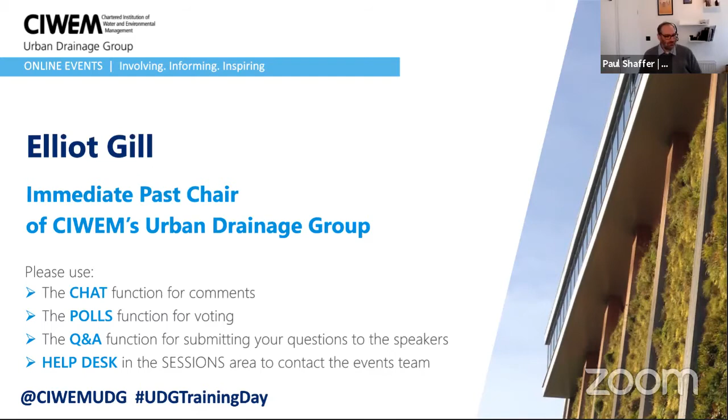A warm welcome, everybody, and thank you for joining us. Just a few words about the Urban Drainage Group, its mission, and some forthcoming events and activities that may interest you. The Urban Drainage Group is here to serve the entire urban drainage professional community in the UK and Ireland - everybody involved in designing, modelling, operating, and experiencing our urban drainage systems, and how they affect our experience of flooding and river and coastal pollution.

So it's quite a dynamic area. It's in the news a lot at the moment. I'm sure lots of you have been following recent news releases about storm overflows and the problems they're causing for rivers. That is just the topic that Urban Drainage Group is really interested in.

Coming up in the next few months, we've got a number of events. The first is an event in August, a conference over 2 mornings, and the theme is climate change and the effect it has on urban drainage systems. If you look on our website, you'll see a call for papers just published for that event. So if you or your colleagues are working in this field and would like to talk to the industry, your peers, and industry leaders on that topic, please read those instructions and have a look.

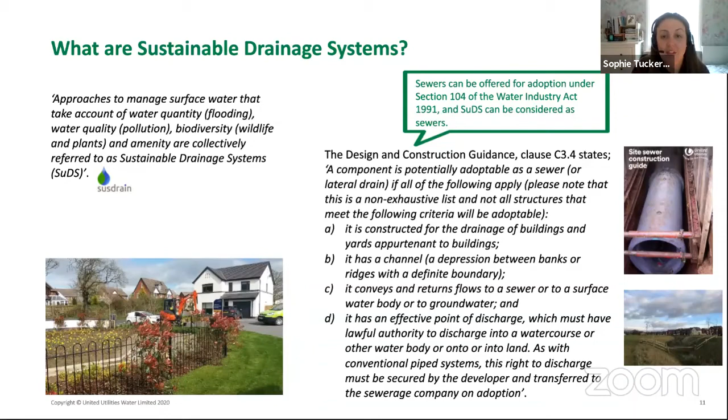As Paul's already given an insight to, they deliver multiple benefits. On the right-hand side, I'm not going to talk too much about this because it will be covered in more detail in a later presentation, but it just explains that certain SuDS can be considered as sewers and therefore adoptable by water companies under the Water Industry Act. So in summary, if something is constructed to drain buildings and yards, i.e. the hard standing areas associated with those buildings, has a channel to convey and return flow to an effective and lawful outfall, it can be considered as a sewer for adoption.

Now I'm going to talk about the drivers for SuDS and why they're beneficial.

On the right-hand side, the industry have developed Big Question 6, which is around how do we achieve zero uncontrolled discharges by 2050, which includes those from flooding and spills to the environment. This is part of the UK Water Industry Research Programme, and these questions are purposely ambitious for the industry, and reducing flooding and spills is of course a priority to us in the water industry.

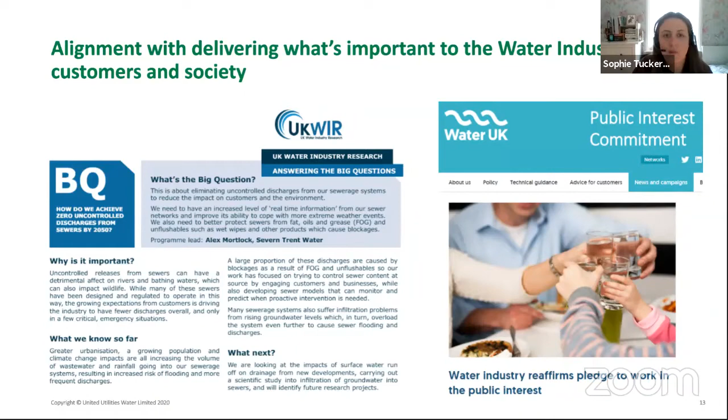Then we've got the public interest commitment. Water companies do have a unique role. We run a vital public service for public good, but we are private companies within England. So through Water UK, all water companies within England have signed up to a commitment with a view to how do we do more to meet the high expectations which rightly come with our unique role as a private company, but delivering that public value. I mentioned this as SuDS clearly provides a great opportunity to deliver multiple benefits to the communities that we serve. So it really does align with what's important to the water industry, our customers and society.

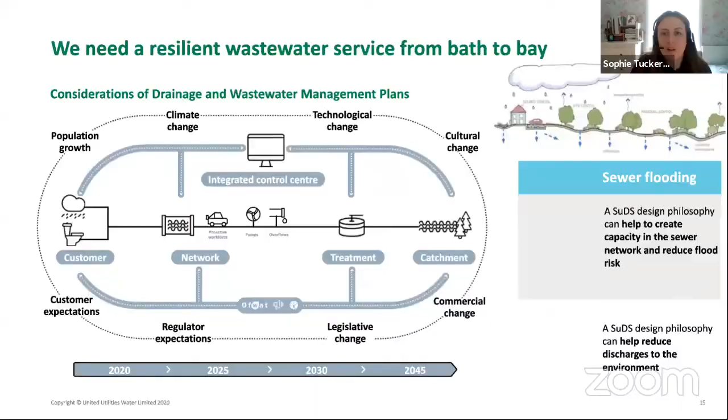When I reflect on the last 12 months from the news, you could argue that we've been disproportionately affected. Therefore, for me personally, this further reinforces why we should look to deliver more SuDS.

So Bath to Bay is a cross-cutting strategy for us to provide a resilient wastewater service. The image shown is for the drainage and wastewater management plans, which is the new way for organisations to work together to improve drainage and environmental water quality, providing the basis for collaborative and integrated long-term planning by water companies with other organisations.

It provides a visual showing how we take wastewater away from customers' properties through the network, which includes pipes, pumps and overflows, to the treatment works before it's treated and returned to the environment. So when we think of our service, the role for SuDS can help us with challenges we face in terms of sewer flooding as well as sewer overflows.

When we think of sewer flooding, our sewers, particularly combined networks, surcharge during rainfall. So there's opportunity to manage that rainwater in a more sustainable way, which will help with that, but also it can help with our ability to freely discharge where we have separate sewer systems, because there is an increase in risk with climate change of hydraulic locking of our outfalls.

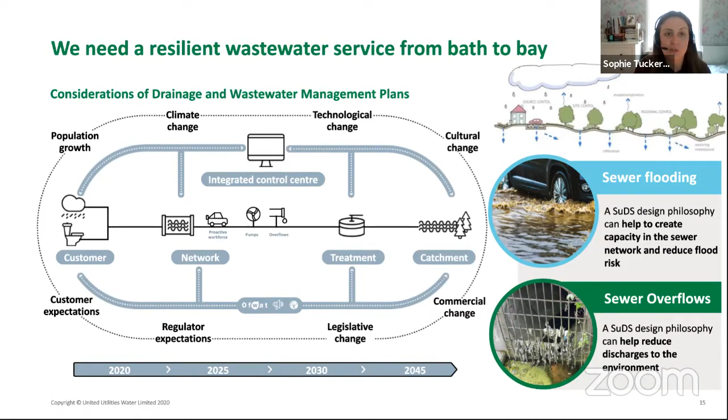And in terms of sewer overflows, if we can manage that everyday rainfall in a more sustainable way and have less of it discharging downstream to the drainage network, by managing it at source or within the site, then this would reduce the need to spill to the environment. Next slide, please.

So now I'm going to talk about SuDS in new developments and some of our experience in adoption.

This slide is a little bit tongue-in-cheek. I've used the term expectation versus reality, because the images taken from the CIRIA guidance show high quality SuDS. However, what is being delivered shows the industry we are all still learning. It's currently more end of pipe attenuation, and you can see a pond within the corner of the site, an interpretation of a pond, I should say. You can clearly see it doesn't really appear natural. It looks a bit heavily silted and it's in the corner of the site.

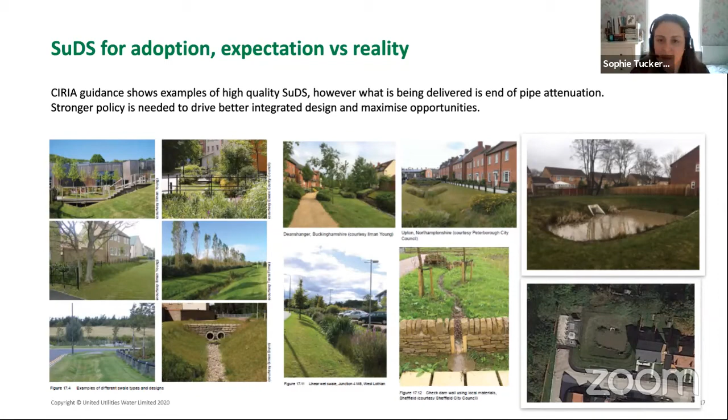So I personally am of the opinion that stronger policy is needed to drive better and integrated design to maximise opportunities. Next slide, please. And just to share some recent experience, lessons and observations.

There is the CIRIA construction guidance, which has a wealth of information and shows a lot of photograph examples of good and bad practice. If you've not taken a look, I would definitely signpost you there. The image I've shown is quite a common issue where there's perhaps not appropriate sediment management within the design and perhaps not the appropriate longitudinal gradients throughout the system.

I've included an image of a SuDS system in the Cheshire area, which shows it reasonably well constructed with a sediment forebay and low flow channel. But just focusing on the observations.

So I've already talked about that, designs are typically end of pipe attenuation, and that makes them deeper components as well, so we've got to think about health and safety. They don't always look natural. And some of the products specified, you could argue, are they appropriate in terms of the inlet head walls, the fencing, all that sort of stuff.

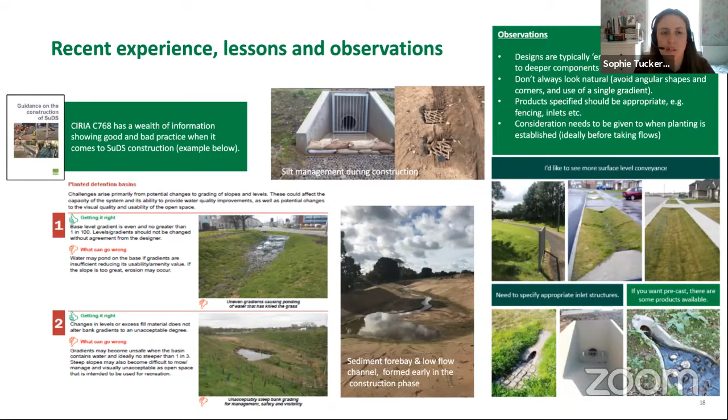And finally, consideration really does need to be given when planting is established. We have had some lessons on sites where the SuDS are constructed reasonably well. However, there's been a period of time where it's just left without any sort of landscaping, so it hasn't established before it's taking flows. Next slide, please.

Now I'm going to talk about delivering SuDS retrofits. If there's one thing you can take away from today, it should be that SuDS opportunities can be created almost anywhere. I am of the view that SuDS should not be delivered purely as projects focusing on drainage requirements. As a SuDS advocate, one of the most frustrating things is the delivery of green infrastructure that misses the water management opportunity, i.e. the green-blue link.

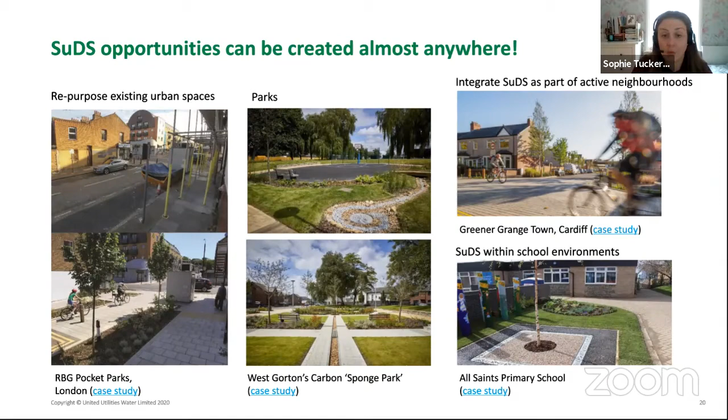This is really interesting. The main driver for this scheme was actually around health and safety, with cyclists regularly involved in road traffic accidents. The location is adjacent to the River Taff. But what was recognised was the surface water runoff drained to the combined sewer, which was then pumped to the treatment works. And what was great here was opportunities were linked up, presenting the chance to deliver a fantastic and award-winning sustainable drainage scheme.

At United Utilities, we are delivering a number of SuDS in schools as well, and we hope to have our own case studies on SuDS training in the future.

Here I've just shared our long-term vision in terms of surface water management. It's important to say that, particularly around retrofitting sustainable drainage, we are absolutely learning and building our capability to deliver more retrofits. To do so, we really have a huge dependency on partnership working if we want to deliver SuDS schemes similar to those shown on screen.

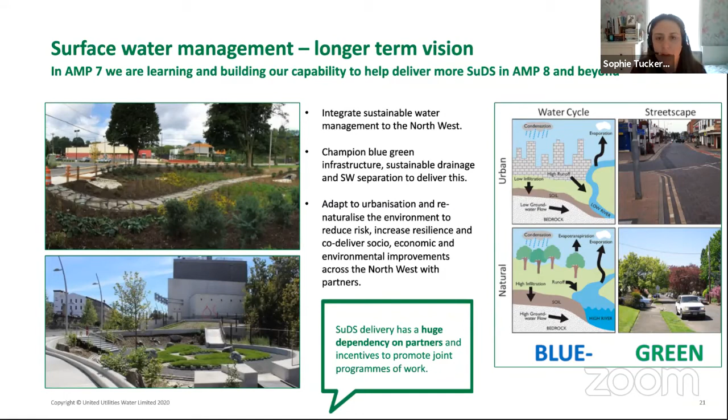This can include cross-cutting strategies like climate change mitigation, carbon reduction, natural capital, as well as underpinning strategies like Bath to Bay, which I mentioned earlier.

Then we have to make a decision in the context of the needs of our customers, the environment and our assets. What do we want to do, which then informs the interventions we might look to do. That could be from monitoring and responding to operational interventions or partnership working, or even project life cycle in terms of whether we want to refurbish something, replace something, or build a new asset.

So it's the asset management decision making that informs any project requirements at the start of a project when we're looking at delivering an intervention.

And of course, all interventions are prioritised. We have to consider the value, considering cost, risk and performance, and of course the whole life cost of that.

So as we build our capability, this includes identifying needs in partnership and the development of designs that include SuDS, but also the delivery of supportable assets that we are confident to operate and maintain, with clear asset information so we can set appropriate maintenance tasks for the assets so they perform to realise the benefits they're designed to deliver.

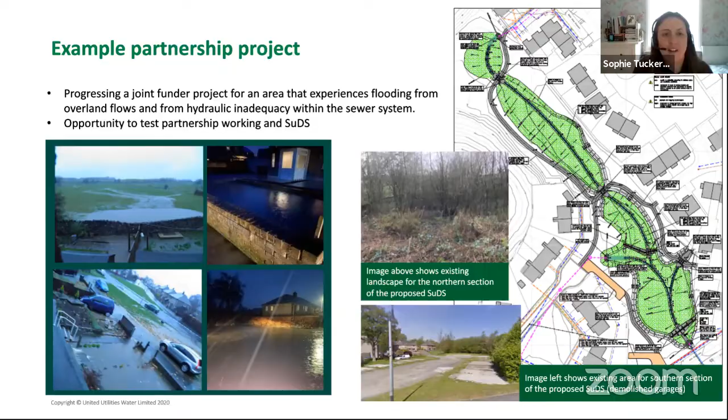So when we think of us as a water industry and reflect back on the public commitment, public interest commitment and all other things, it feels really positive that instead of just burying a pipe below ground that has little value to communities, in some cases SuDS can be the right solution to deliver those greater benefits. So on that note, that's just an insight to SuDS and the water industry.

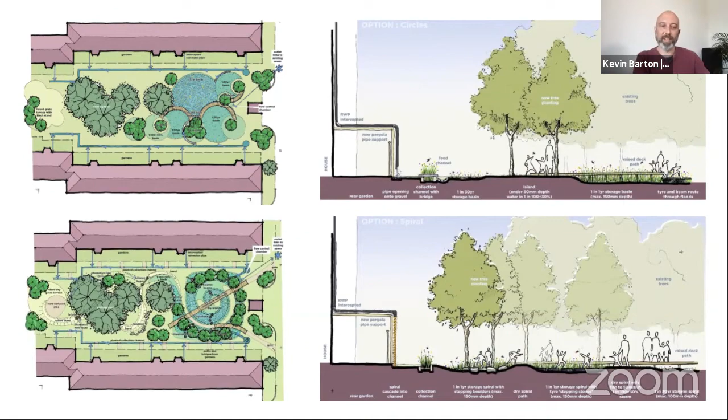A project of ours in White City, lots of opportunity for creating dynamic, playful, climate resilient landscapes. That's another big issue for us, that we really employ SuDS to resolve in cities. Again, it's the opportunity of rainwater, by diverting rainwater to these landscape spaces that manage that rain. We can create incredibly resilient landscapes that are resilient to the droughts we increasingly are seeing through the summer months, to create this sort of quality green infrastructure that can be playful and bring all these multiple benefits, and connect people with nature and the water cycle. That's something that's been sadly missing from our urban environments, is this lack of connection with rain and the water cycle.

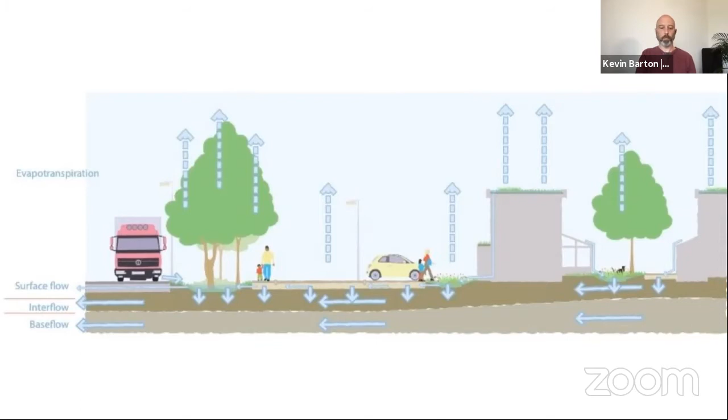Another important idea is interception losses. This is about emulating what happens in nature in most rainfall events, where the first part of a rainfall event just coats the leaves of trees, coats the surface of plants, and soaks into that first bit of topsoil, rehydrating soils. We call these interception losses.

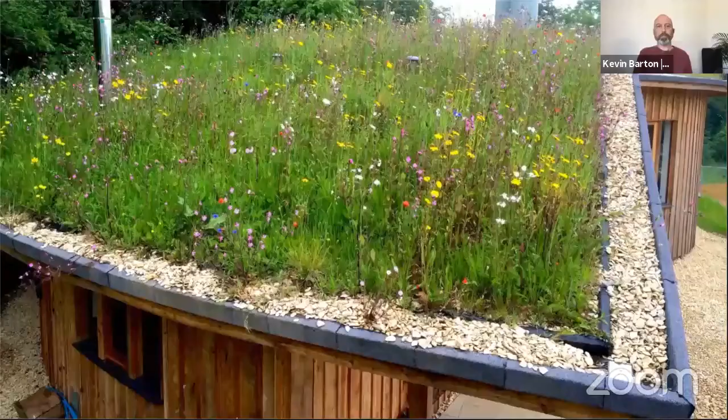The more we use nature-based solutions and spread the management of water across our site, using the urban fabric wherever we can to manage rain, the more interception losses we get. Something like this green roof will lose 10 to 15 mil of every rainfall event, more than 95% of rainfall events will just soak up into a green roof like this, 100 mil of substrate. Any pollutants are lost, but at least the first 5 millimeters of rain will just disappear onto this green roof and won't drain away.

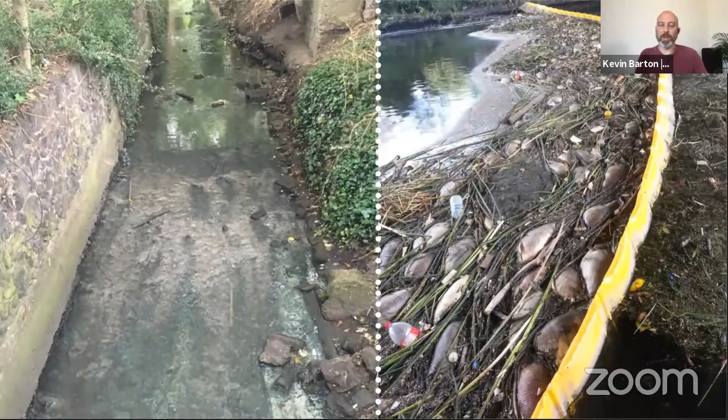We really want to reduce the risk of pollution, not only to the wider environment but within the development itself. These mass fish kills we regularly see in our urban environments are caused by the cocktail of pollutants, heat, and microplastics that wash off our urban surfaces, particularly in summer when natural river levels are low and there's limited dilution. Plus, the heat from urban surfaces means polluted runoff carries very little oxygen. We get these mass fish kills.

We have an epidemic of misconnections in our urban environments because our rainwater pipes disappear into the ground and people don't know the difference. They assume it's all dealt with correctly. They plumb in a toilet, plumb in a dishwasher, and we have urban waterways which are wall-to-wall sewage fungus, and you can smell it from 20 meters away.

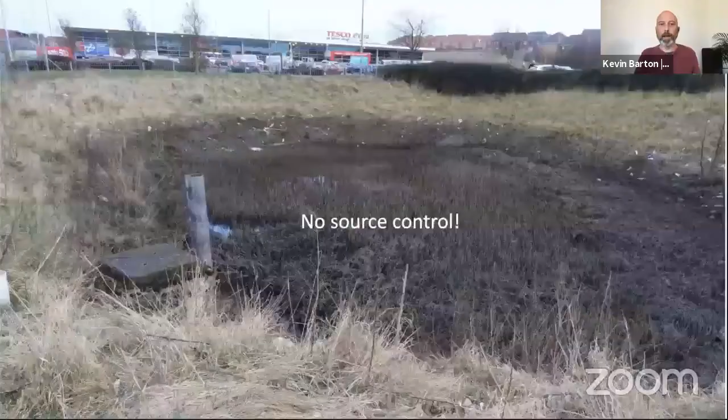Yes, we need to solve those problems through our SuDS design, but if we only focus on trying to clean that water before it leaves to protect the wider environment, we fall into the trap of potentially having features like this, where we use the landscape just to remove pollution and protect the wider environment, but create spaces within our development which are highly polluted, ugly, a maintenance issue, and don't hit the other pillars of SuDS, the amenity and biodiversity. It's actually a negative amenity feature and a negative biodiversity feature.

So we want source control features within our development that remove those pollutants as close to where the rain lands as possible, as close to where those pollutants are mobilized from urban surfaces. Things like permeable pavements, green roofs, bioretention rain gardens, filter strips, and swales that take that pollution out early in easy to manage ways, protecting things like this basin here, which is a play basin in the heart of a housing scheme, so that it isn't getting polluted runoff when it rains and can become a usable landscape space.

We want to manage water at or close to the surface. Our aim is to manage it at the surface as much as possible, minimize the water disappearing underground, and bring it back as soon as possible. If we have to put it underground in a pipe, that pipe is a connector between SuDS features, the landscape is the network, the drainage network. The pipe system isn't the drainage network. It's simply a connector where we need it to go to a flow controller, from one piece of SuDS system to another. But wherever possible, we're trying to manage the water on the landscape.

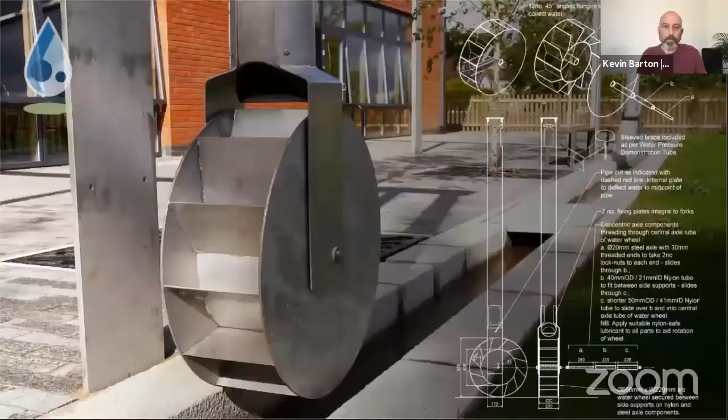If we do, we can create interesting features like this swale maze in a school, which brings lots of benefits around play, amenity, education, and biodiversity opportunities. We have landscapes that come alive when it rains, these dynamics of landscapes changing, with people connected to that water cycle, seeing things happen when it rains and understanding that the landscape has this other life, this other function, seeing this clean water regenerating a landscape, keeping it alive, even having playful features that really make the most of this.

We've got one case in White City where I saw a young boy take his mother over to one of the rain sculptures. He understood that this visual effect only happens when the rain's hard enough, and it was only raining gently. So he explained to his mum that it wasn't happening yet because it wasn't raining heavily enough, and asked could he come back later if it was raining more heavily to see this visual effect happening.

In this science block, we had these demonstration features of a water wheel and a tipping bucket, and another feature around the other side, to make this landscape come alive when it rains and keep this water flow at the surface and visible, creating this dynamic landscape.

One thing that's really important to us as landscape architects, and should be to anyone working in urban design, is that we need to be designing our systems to benefit local communities. There's lots of opportunities that SuDS brings in terms of benefiting local communities.

Here, two lanes of highway were put over to green infrastructure to manage runoff, but it's effectively created a park where there wasn't one before, and people are changing their behavior - getting off the bus earlier to walk through this on the way to school, using this space as an amenity at lunchtime. This is an expansive SuDS system, managing runoff at the surface - polluted runoff from this highway across a flush curb as sheet flow into this cascading SuDS feature. It's a totally multifunctional feature which benefits the local communities of Sheffield.

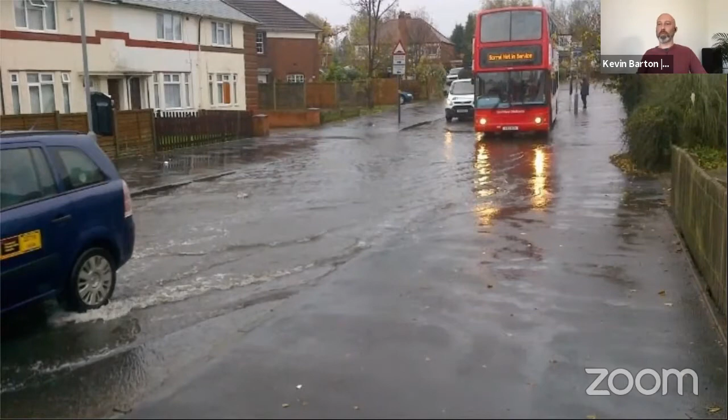And finally, you probably wondered where this one was - what we historically have focused most on, the flood risk. Yeah, obviously, that kind of catchment scale or local flood risk. Probably because I'm running out of time, and I think we've got a 3-minute lag, which would make the poll very difficult. I won't probably do the poll at this point, but just say that, yes, actually, obviously we need to do that.

And actually, if we've done all the other things that I've talked about, the other kind of philosophies of the SuDS, actually we've achieved most of the kind of flood mitigation that we need to. It's actually then quite easy to achieve the sorts of volumes we're talking about.

But there is kind of one fundamental shift, which I think really helps us design in ways that allows us to exploit as much of the landscape as possible. And that is to think of not what volume does my whole development need to manage, but actually what volume does each surface, each roof plane generate. Typically on most schemes, that is around 70 to 100 millimeters depth of rainfall that lands on every hard surface is what you will need to find space to store in the landscape.

And if we break it down like that, as in, this roof plane generates 5 cubic meters, I can start finding a space to put a rain garden, and then a swale with attenuation in it, or a basin, and I can start finding spaces around the landscape that manage the runoff that comes from that particular surface, or that car park area, or that footpath.

This is really critical, and I think something that is often missed from design - there's a volume that each surface generates. If we think of it like that, then we're less tempted to resort to one feature or a couple of features down at the end of the system that's managing the runoff from the whole development. We need to think of it as each catchment, each roof space, each hard surface generates a volume of its own that we can manage in the landscape.

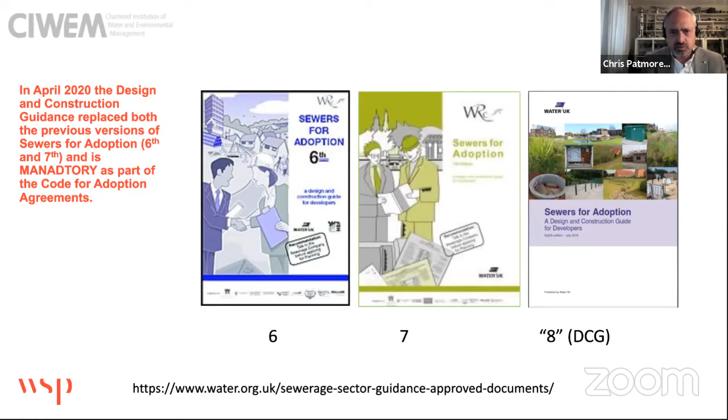The other key thing about the new design and construction guidance is that it's now mandatory. It may not be fully aware to you, but sewers for adoption previous versions were still guidance, so there was some flexibility - a different approach between water companies on various ways of dealing with materials and construction techniques. The new DCG is now mandatory across all English water companies. There are some subtle changes allowed, but essentially if somebody presents a design in accordance with the DCG and it's presented for adoption, then the water company is obliged to adopt.

So if we run through some of it - to accompany it and publicize it, there's been a few white papers and guidance notes. I've given links to a couple that have come out since. Probably the leading one is the Water UK one, which is basically the people behind the DCG in the first place - it gives you a quick overview of how it's aimed to be implemented and how it's applied.

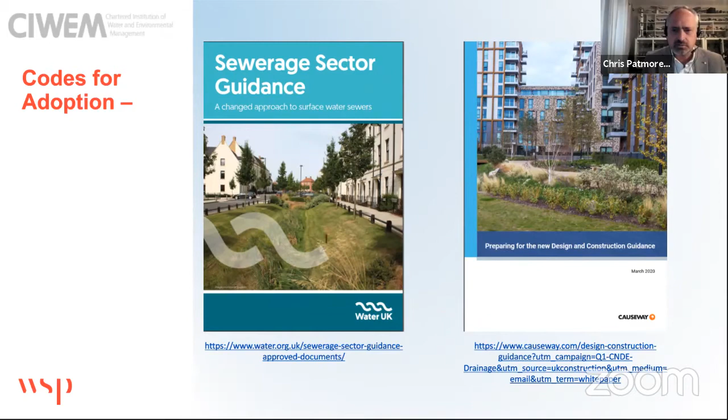What it looks like - the DCG is actually part, as I said, of this code for adoption, and it's referred to as Appendix C of the code for adoption. The website link is here. As I said, it's worth reading a lot of the other sections about how the adopted drainage network can be applied for, what information is required, and how the process works.

Also there's a review system, because it is a new entire suite of documents rather than one - they're looking at whether there are some issues with it, are there ways it's not being brought forward, are there communication issues, are there documents that are just plain confusing or don't include enough information. So this process is built into it. Appendix C is the design and construction guidance, which is essentially sewers for adoption 8.

But basically, the main change from all the previous sewers for adoption is this massive step change into trying to address SuDS, trying to incorporate SuDS, but doing it in a way that doesn't mess up the legislation or require additional legislation to make it function. So it's all worked around the existing Water Acts, the NPPF, and the Flood and Water Management Act. There's a lot of background to it.

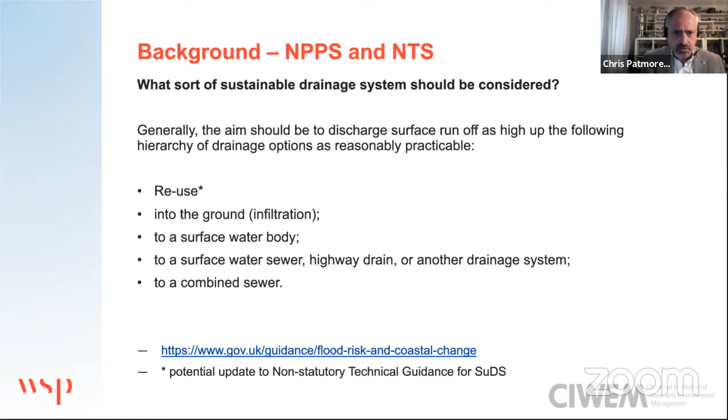You'll note there's no definition of a foul sewer in there. So historically, the issue we've had is that planning has always been pushing for this hierarchy, but the adoption side has always been pushing for: well, we can adopt a pipe because we know what it is, we've designed them for years, a pipe is a pipe. We can adopt that, but all these other SuDS features are getting a bit grey as to who takes over ownership, who operates them, how do they integrate with a pipe system. Are there issues in terms of cross contamination? Are there areas now being drained that wouldn't be drained under the Water Act and various other things? So there was always this contrary pressure between the two.

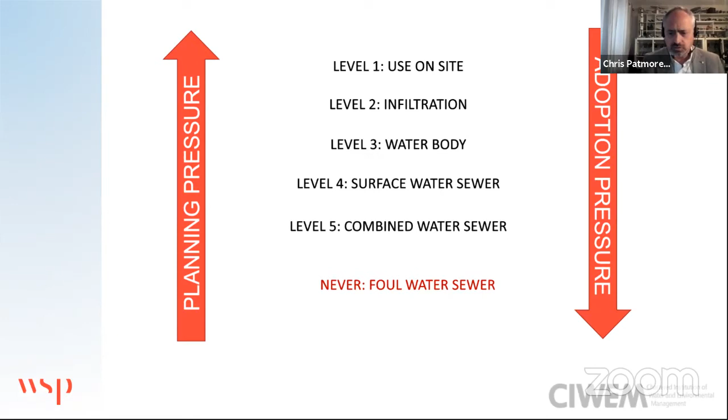So what the DCG is trying to do is address that by looking at the definition of a sewer and how SuDS can be brought into the documentation, into the design processes, into the management processes, in a way that isn't contrary to the Water Industry Act, and in a way that is understood and easy to disseminate and share.

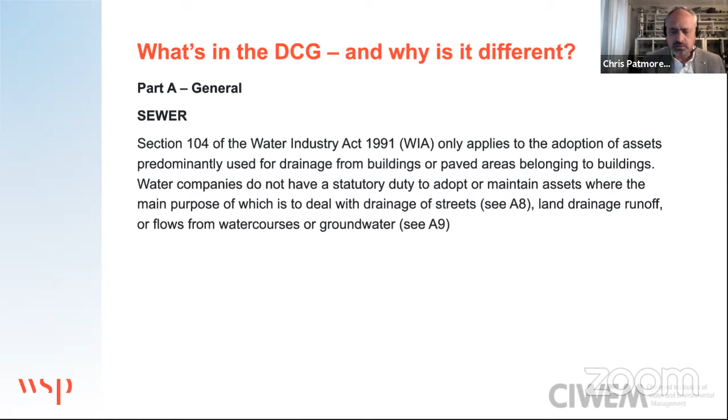So basically, a sewer has to be a facility for transporting water that doesn't include land drainage, and it primarily doesn't deal with the drainage of roads. So as Sophie was saying, it's to do with buildings and their major areas.

Although under the Act, water companies aren't obliged to accept runoff from highways, there will be sites where there is a crossover, and there will be elements of highway drainage that goes into a public sewer network. But it is generally through agreements and common practices established between highway teams and the water companies. Land drainage is almost more cut and dried, in that water companies generally do not

like the idea of land drainage entering the public sewer network. This has historically been a stumbling point with sustainable drainage systems, where the interface between is it draining land or is it draining a public area becomes a sticking point. So what we're trying to do in the DCG and the code is get past that hurdle as well.

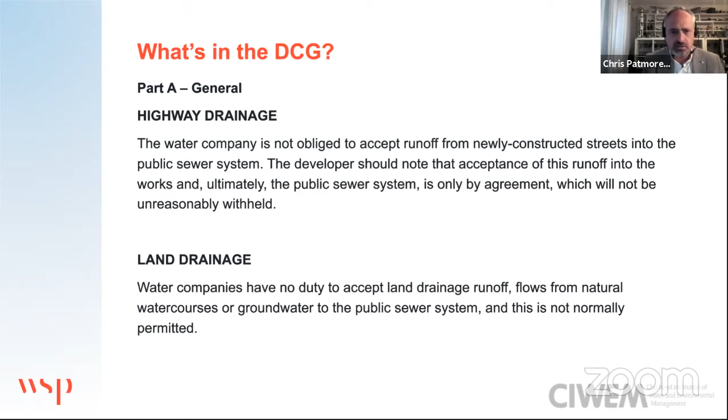So this is pretty much the same list as Sophie had on her first slide, which is that the definition of a sewer, and therefore the definition of an adoptable SuDS feature, is that it has to be draining buildings and the areas around them. So this is not actual private individual drainage, but collectively the drainage of multiple buildings. It has to be a channel of some sort that can be followed, defined, and easily discernible on the surface or below ground. It has to convey and return flows to a sewer, or to a surface water body.

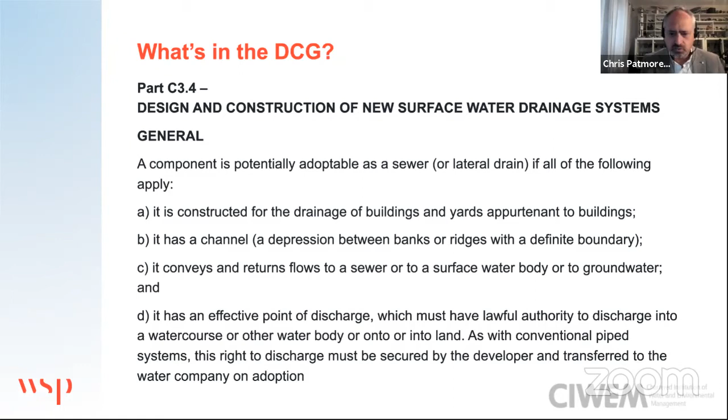And it has to have some discharge point which is lawful, and there are lots of reasons for that in terms of riparian ownerships, in terms of access, in terms of what the water company can then get to do maintenance and follow up. So it has to have a discharge point at some point on the network - the limit of adoption, in other words.

This goes back to what Paul was saying about end of pipe solutions - they end up putting in a basin at the end of the system with a flow control in it. It takes all the drainage from the site, puts it into one place, but previously it's not adopted by the water company, so it has to be an offline system.

Being an offline system means there has to be an online route, and the issue with the online route is that it's generally a pipe network. It may also be a pipe network designed for the 1 in 30-year event, because that's what the previous sewers for adoption suggested it should be. What happens is that the flows for pretty much 95% of all rainfall events go straight down the pipe network and bypass the basin completely, so all of this multiple benefit, this treatment, this water quality is missed.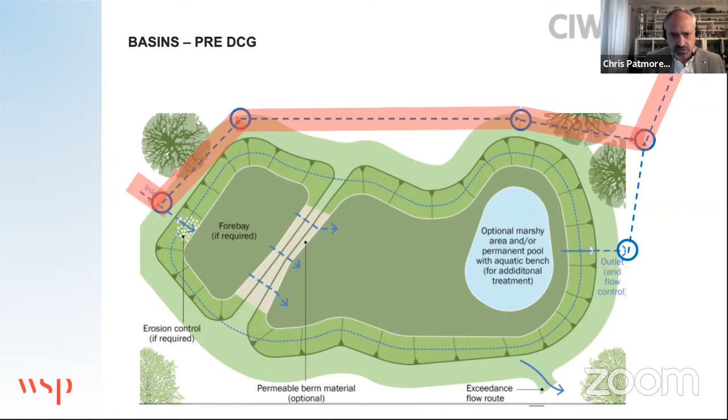Under the DCG, with the new definitions, what we can now look at is that the flow path is through the basin. The basin is now online, it's now fully potentially adoptable, and that means every single rainfall event gets the chance to go through that basin. All of the things Kevin was talking about - the losses through the system, the infiltration, the evaporation, the take up by the plants and soil - all of those can happen to every single rainfall event. So what you end up with is less volume and less flow coming out, and in a lot of cases you may not even get a discharge from the site, whereas previously you'd get discharge every time it rains. That's one of the benefits of what the DCG can bring forward.

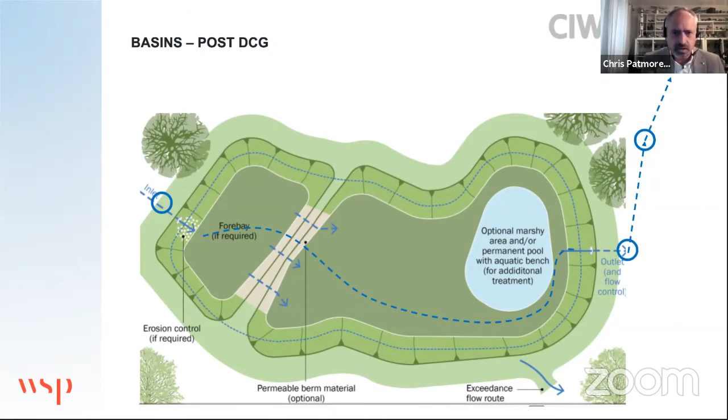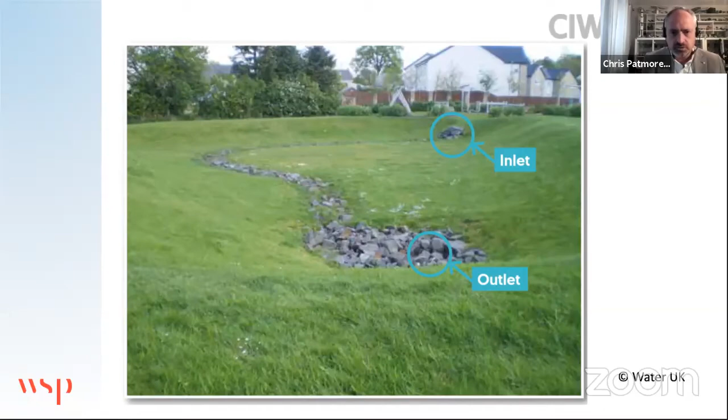As an example, we have one here where this attenuation basin has a low flow channel built into it, with a discernible inlet and outlet. Under the definition of a sewer, it becomes a sewer and therefore adoptable under the DCG, providing all of the other design parameters are in accordance with sewers for adoption - the SuDS manual. So in terms of health and safety, biodiversity, materials used, side slopes, access - as long as it meets all of those criteria in the SuDS manual, it's an adoptable asset.

What it means in a network of features, if we're looking at a combination of structures, there are certain things which you can't define as a sewer. So blue-green roofs, for instance, that Kevin was talking about, because they are within individual buildings, even if it's a block of flats, it's still classed as an individual building - that falls outside the definition of a sewer. In the same way, permeable paving and some storage tanks could be within individual properties, in which case they're only serving that property and don't convey water from multiple places.

They're not necessarily adoptable. Permeable paving also has this integral role as the carriageway itself, so if it was going to be adopted, we'd be talking about highway adoption rather than water company adoption.

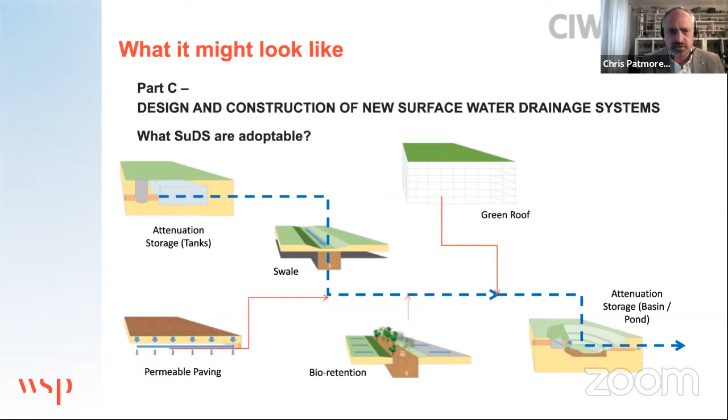Bioretention has mixed issues with what it's draining - it's all to do with what it's draining. If it's draining highway, it will be a highway feature. If it's draining individual buildings, it would be private. But if it's draining multiple buildings and elements of highway, then you could wrap that into the adopted sewer network. Swales, for instance, historically on highways get adopted as a highway structure, but in an integrated drainage network, you could use that in place of sewer connections to convey water from one place to another, and therefore become an adoptable feature.

So there are new challenges for the water companies when you are essentially bringing the sewers to the surface - how do you delineate them? What we don't want to see is swales with 1.8 meter high chain link fences with barbed wire on, and life buoys every 100 yards or whatever. We want to see them integrated into the landscape, integrated into the urban realm, and become transparent in how they function.

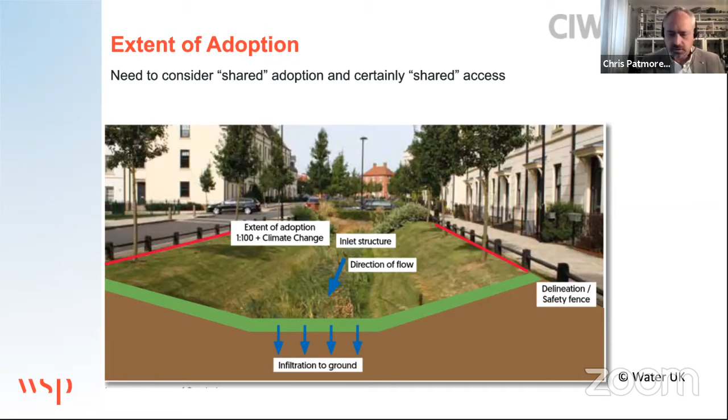Basically extending what Kevin was talking about earlier, one of the things that needs to be considered is the delineation, the areas of adoption. In this particular example, it's fairly straightforward in that the swale occupies basically the space between the dwellings and the highway, so it's quite easy to define that.

If we look at another example of an underground drained swale alongside an open space area, you end up with an area on the right of the screen which is basically an area where there's no defined boundary between the drainage asset and the open space. This is where historically perhaps the idea of land drainage interfering with SuDS adoption came in, because if all of that area was actually deliberately draining towards the swale, there could be challenges from the water company as to the adoption of that asset because of the amount of land drainage it may or may not be accepting.

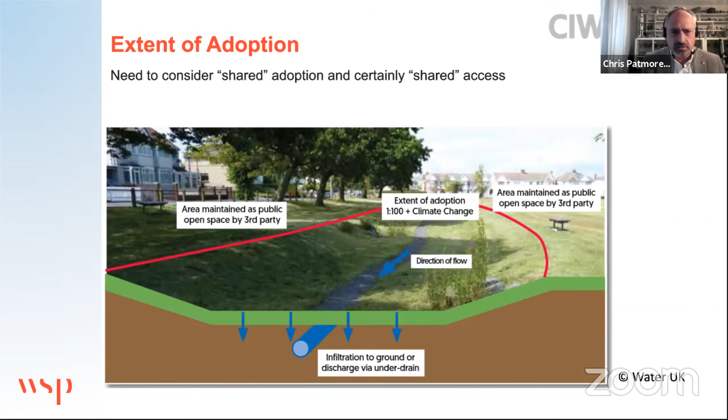So those are elements to be considered in the whole planning and strategy of the drainage. And what we want to avoid is this bomb crater thing that Paul was talking about, where the end pipe solution is thrown in at the end of the site. The invert levels are pulled down because it's the only way to get all the pipe connections to work, trying to store below the inlet to meet the sewers for adoption criteria for no surcharging, etc. This creates pits which are of no real benefit to wildlife.

They're no real benefit to amenity value. They're very hard to maintain in some cases, inaccessible, and a loss of open space area. Sometimes the challenge developers put forward is, if you do this, then that's a loss of public open space. So I want to minimize all of that, which is exactly what Kevin was discussing.

What we want to do is bring it back into a more naturalistic, multi-purpose arena, which suits what planners are after. It suits this whole SuDS philosophy and strategy, and it will get that better urban realm, the better living experience that Kevin was talking about.

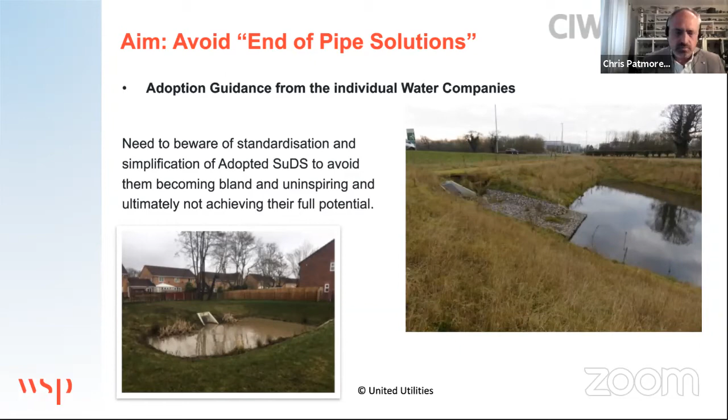But in the background, it would also give all of the water companies a lot of benefits, which they're having to deal with on a day-to-day basis, because there's water pollution, uncontrolled discharges, misconnections and all of that sort of stuff. If you've got a system you can see on the surface, you're less likely to have those things happen.

One of the benefits of allowing the water to be lost in the system is that the downstream sewers it connects to are then going to be receiving less water than they would have been normally. And then you're releasing the burden on the treatment plants, the outfalls, the rivers downstream, and reducing flood risk. So those are all benefits, and as Kevin was highlighting, there are also the benefits of costs as well.

One of the things not necessarily covered in this slide, and not necessarily a prime driver of the DCG, but worth mentioning, is this multiple benefit, in that even the water companies have carbon targets, air quality, pollution, amenity, and all that sort of other elements that SuDS can provide in the background. A lot of drivers now for introducing SuDS into schemes are things like air quality or urban heat island reduction, not necessarily driven by drainage, but driven by other bodies, and funding and various other things can come from that. In combination with the water companies, you can actually get better solutions.

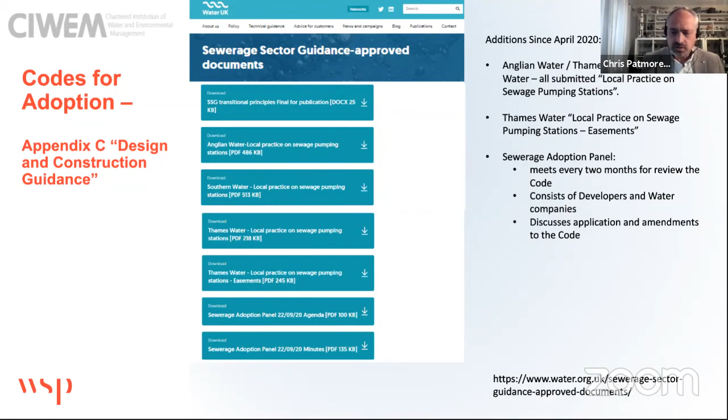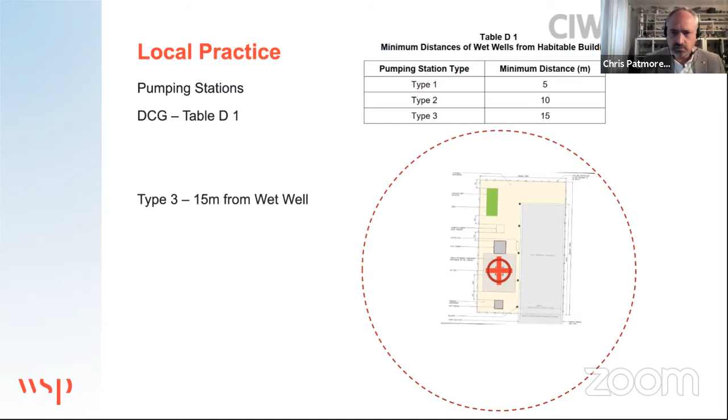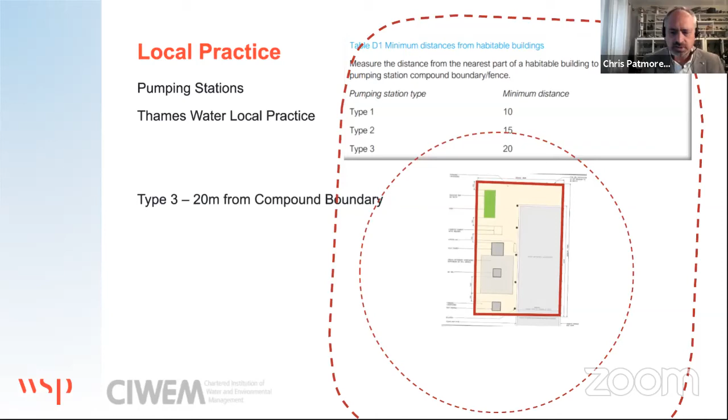One of them is Thames Water, for instance, under the DCG as it's currently published. If you look at table D1, and take a look at the definition of the minimum offset distance from the wet well of a pumping station to a habitable building - generally a foul pumping station - under the DCG as it sits at the moment, it's 15 meters from the wet well. What Thames have been looking at is that it actually shouldn't be 15 meters from the wet well; it should be 20 meters from the compound boundary, which is a completely different measurement, a completely different offset value. But I suppose basically the lesson to learn is: keep an eye on all of the elements within the DCG, what's changing, what's coming up, and be aware that there might be some regional variations.

And this is one example.

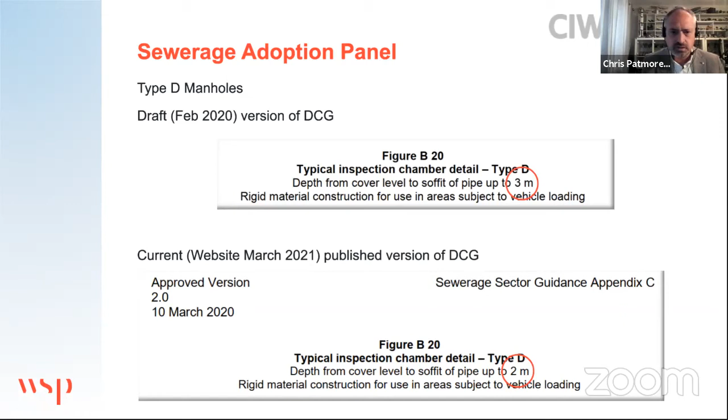In terms of what the adoption panel is also doing, it's looking at errors, corrections, and amendments that need to be made to the DCG. One example currently going through the vetting process: when we were looking at the draft DCG, we maintained a depth for inspection chambers of 3 meters, which was from previous Sewers for Adoption manuals. But when it came to the final version, it got amended to 2 meters. So the adoption panel is now looking at reversing that back to 3 meters, because a 2 meter depth for the inspection chamber was causing issues with adoption areas.

The companies involved, you probably all know who they are - all of the English water companies are involved in this. One thing that's definitely needed, and that we're rolling out along with CIRIA, CIWEM and Water UK, is a training program for all these water companies to bring them up to speed with what the DCG requires them to do, what it means to them, and how it ties in with planning. That was one question that came up on Sophie's talk - how lead local flood authorities communicate with water companies, Environment Agency, lead local flood authorities, internal drainage boards, etc. That is all being rolled into the DCG.

One of the criteria is that water companies do not dictate the discharge rate that is acceptable into their networks. That is to be dictated by the lead local flood authority, because that is their role, and it recognizes that. Basically, what we're running through is quite an extensive training program, to do something similar to what we're doing today, but advising on what to look at, what could be adopted, and what can be integrated into their networks.